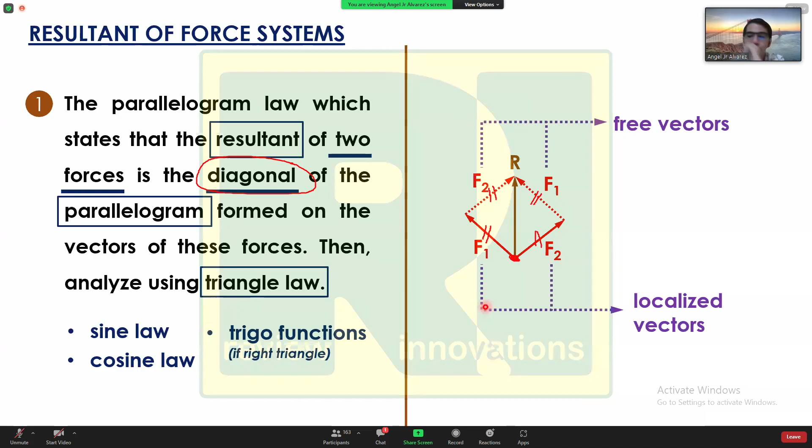Okay? So therefore, that is your answer for question number 1, 76.15. Sa mga hindi sanay na mag-simplify ng equations, pwede nyo namang i-shift solve. Okay? So shift solve, type nyo lang to, then shift solve. Okay po?

Okay, what about for question number 2? Pinapahanap for number 2, what is the corresponding value of the component along BB prime? So pinapahanap is yung force sa BB prime. Okay? Since meron ka ng value ng alpha, meron kang 300 dito, meron kang 240 dito, para maiba lang, let us use cosine law. Okay, cosine law naman ang gamitin natin.

Actually, pwede naman kayong mag-sine law kasi equal din dito sine alpha over F BB prime. Eh may value naman na kayo ng alpha. Okay? Pero para maiba lang, gamitan natin ng cosine law. That is your F BB prime squared. That is equal to what? Square nung first side at nung second side. So therefore, that is 300 squared plus 240 squared.

Minus 2 times product nung dalawang sides, which is 300 and 240. Then cosine of the opposite angle, ang opposite ni BB prime ay alpha. So cosine of 76.15 degrees. Okay? So in this case, you can now solve for the component along BB prime. Sige, try natin ha. Sorry.

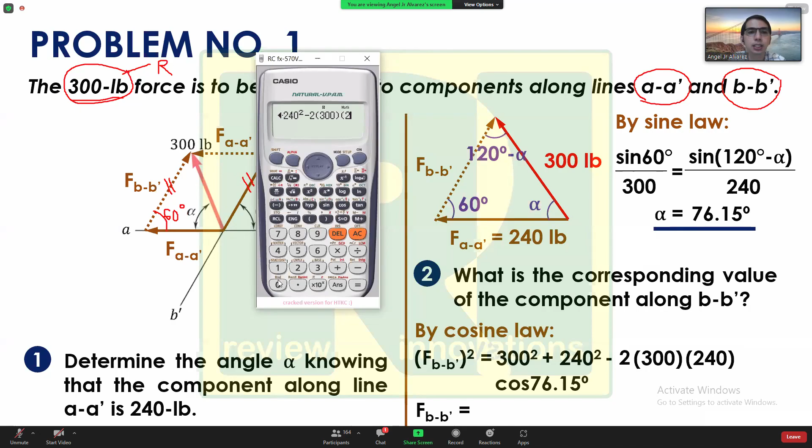Okay, that's 300 squared plus 240 squared minus 2 times 300 times 240 cosine of 76.15. Okay? Press equals. Kaso hindi pa ito yung sagot kasi equal pa yun sa naka-square. So therefore, take the square root. You will get 336.35. Okay?

If you don't round off, the exact answer is 336.33 pounds. Nevertheless, malapit naman yung sagot. Okay? So therefore, that is your answer for number 2. Any question? Ayun, may sumagot. 336.34. Okay po? Any question for problem number 1?

May question po? Malinaw po ba yung problem? So far, mukhang malinaw naman. Walang nagpo-question. Okay. But again, tatandaan, ang parallelogram law ay pwede mo lang magamit kapag resultant lang ng dalawang forces.

Okay? Ang tanong ngayon sa inyo, sir, paano po kapag more than 2 na yung forces natin? So, hindi na tayo pwede mag-parallelogram law. Okay? So, again, si parallelogram law ay pwede lang gamitin kapag 2 forces lang. Kapag more than na, hindi na natin pwedeng gamitin yan. So, ano pang ibang way para ma-solve natin yung resultant without using parallelogram law? So, discuss natin yung ibang ways para ma-solve yun.

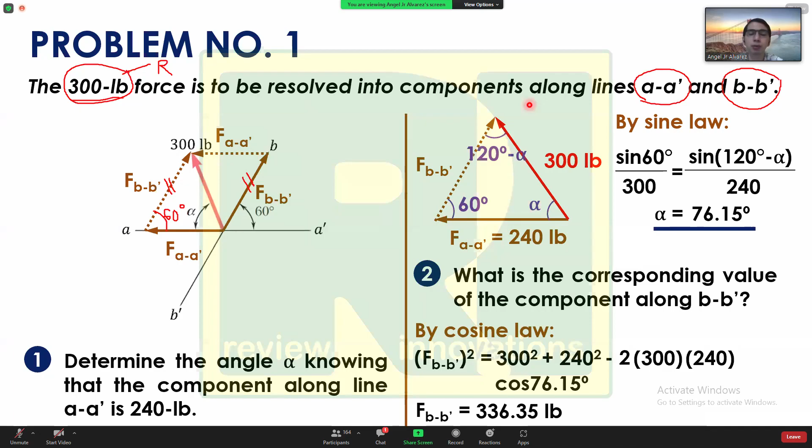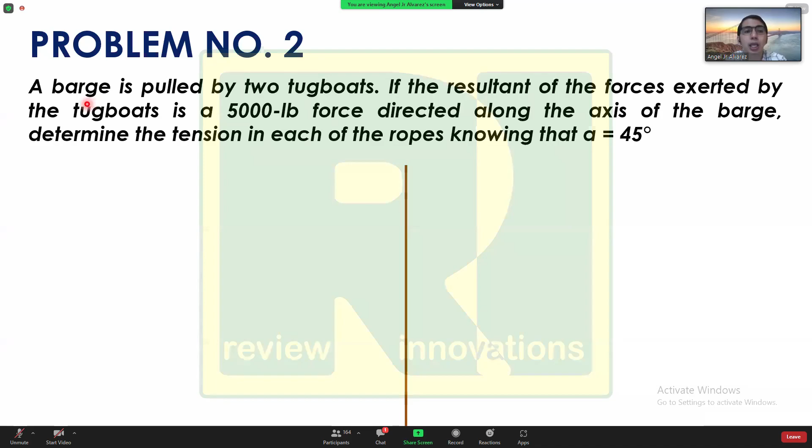But before that, discuss muna pala natin, meron pa tayong problem number 2. Sige, try natin yung parallelogram law pa para mas maintindihan natin. Problem number 2 muna tayo. Okay, for problem number 2, a barge is pulled by 2 tugboats. Ito yun.

Okay? If the resultant of the forces exerted by the tugboats is a 5,000 pound force directed along the axis of the barge, determine the tension in each of the ropes knowing that alpha is 45 degrees. Okay? So, dalawang forces lang naman ang humihila sa barge natin. Meron tayong rope 1, meron tayong rope 2.

At tatandaan po, kapag ropes, lagi yang tensile. Kasi kung ito yung rope nyo, pag hinila mo, may resistance. Pero kapag tinulak mo, walang resistance. Okay? So tatandaan po, kapag po ropes or cables, lagi pong tensile ang force. So let us say this is your cable 1 or rope 1, this is your rope 2.

Ilagay natin yung forces. Cut natin to, cut natin to. Lalabas po dito, tensile force for rope 1. This one is the tensile force for rope 2. Anong sabi? Ang resultant daw ng mga yan is a 5,000 pound force directed along the axis of the barge. So, ibig sabihin, binigay yung resultant.

So, ang gagawin natin, kukunin natin ang resultant ng dalawang to. Okay? Resultant ng dalawang forces. So, ibig sabihin, parallelogram law pa din. Tama? O, anong gagawin pag parallelogram law? Ito, kokopyahin sa tip ng other force. So, ito ay T1. Itong isang to, kokopyahin din sa tip ng other force. So, therefore, this is your T2.

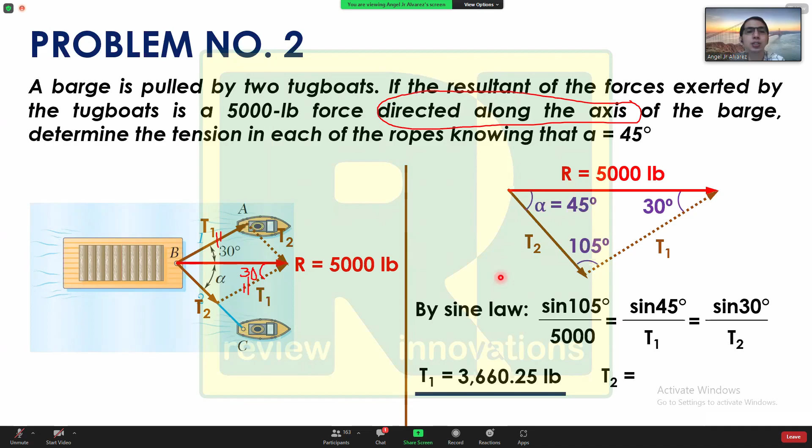So you can now solve for the value of T1 and T2. Okay, solve natin isa-isa. What about for T1? That's 5,000 sine 45 over sine 105. Calculating for your answer, you will get 3,660.25 pounds. What about for T2? For T2, that's 5,000 sine 30. So technically, papalitan lang natin yung angle. That's 5,000 sine 30 divided by sine 105. You press equals, you will get 2,588.19 pounds. And those are your answers for problem number 2.

Okay? Any question? May tanong po? Going once, twice, thrice, none po, sir. Okay, so thank you.

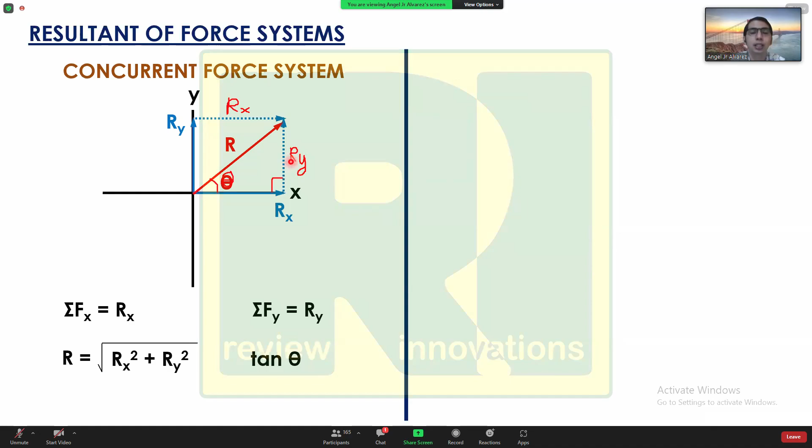Paano naman natin makukuha ang direction? Direction can be represented in terms of angle. So itong angle na ito, let us say this is angle theta. Paano ko masosolve ngayon si angle theta? Tangent of theta, that is opposite, which is Ry, over adjacent, which is Rx. So this is one way to calculate for your resultant force. Ang gagawin natin, yung lahat ng forces na ibigay, kung ilan man yan, pagsamasamahin ang x components, pagsamasamahin ang y components, then you get your resultant using Pythagorean theorem, and you get your angle using tangent theta equals Ry over Rx. Any question?

May tanong pa? Are you still there, guys? None po, sir. Sige, wala daw tanong.

Sige, try natin ha. Solve naman natin yung next problem. Sige, next problem po tayo. Problem number 3.

For problem number 3, the magnitudes of the three forces applied to the eyebolt shown are T1, which is equal to 515 newtons, T2, which is equal to 200 newtons, and T3, which is equal to 750 newtons. Replace these forces with a single equivalent force, R. So technically, pinapahanap po ang resultant force. Paano natin makukompute ang resultant force nito?

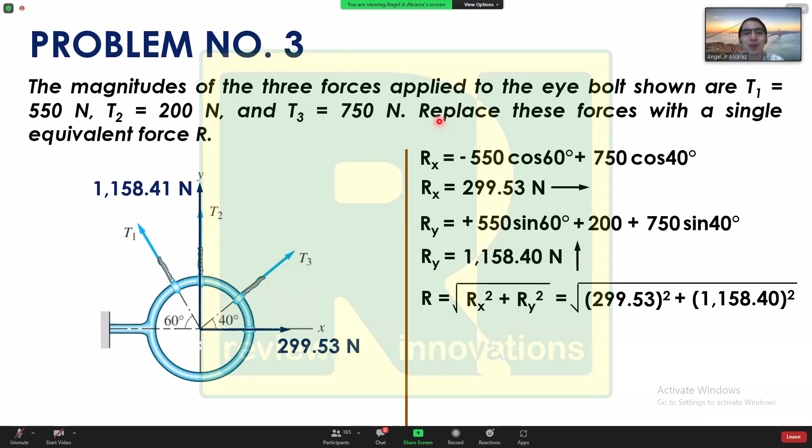Okay, so given that one, ibig sabihin, itong tatlong to ay mapapalitan na nitong dalawa. Isang to the right, na Rx, which is 299.53. Ito ay upwards kasi positive ang lumabas, isang upwards na 1158.41. So calculating for your resultant, that will be square root of Rx squared plus Ry squared. So therefore, that is square root of 299.53 squared plus 1158.4 squared. So therefore, the resultant, ang bilis nyo, 1196.5 newtons. And that will be your answer for this problem.

But again, sabi ko nga sa inyo, if you will calculate for resultant forces, dapat kompleto ang tatlong properties: magnitude, ito yon; direction and position. Yung direction, madali yon, you can represent that in terms of an angle.

So kung ito ang resultant natin na 1196.5, magsosolve tayo ng angle. Let us say ito yung angle na yon. Tangent theta is Ry over Rx. So your Ry is 1158.4 divided by 299.53. So therefore, your theta is 75.5 degrees. Ibig sabihin, itong isang to ay 75.5 degrees. Any question?

Pa-check po ng value ng theta. Kung tama bang 75.5? Wait lang, far from my calculator. Tama, sir. Okay, so therefore, that's 75.5.

Okay? Kasi medyo mahaba, di ba? Kasi solve ka pa Rx, Ry, tapos solve ka pa resultant, tapos yung theta, ibang solution pa yung theta mo. So ngayon, tuturuan ko kayo ng way kung paano masosolve to gamit ang calculators ninyo. Calculator lang ang gagamitin natin. Sige, try natin ha. Pero I do not suggest na you will rely on this solution. You need to know yung basic principle natin. Okay? In case malimutan yung calculator.

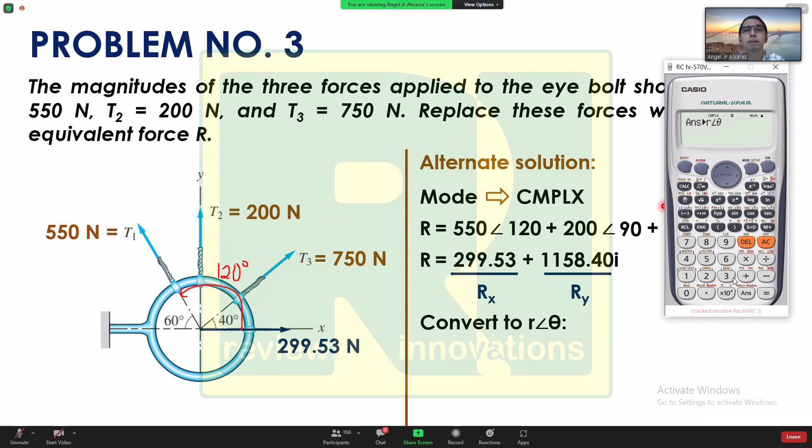Ngayon, paano natin sir palalabasin yung resultant? Okay, sige. Pag tininan natin yan, pag inequal nyo, ito si Rx, ito si Ry. Para mapalabas po yung resultant with the corresponding angle, you have to convert that in terms of R theta. So shift, you press shift, 2. Okay, yung number 2 dyan. Then i-convert daw natin sa R angle theta. So you press 3. You press equals. Lalabas po si 1196.5 angle 75.5.

Okay? So, ibig sabihin, this will be your resultant and this will be the value of your theta. Okay? So, yung theta na to, saan ba ang reference nitong mga angles na to? Lahat yan galing positive x. So, itong 75.5, ano ibig sabihin yan? Measure ka ng 75.5 degrees mula positive x, nandoon ang resultant force. So, therefore, this will be your answers. Okay? Any question?

Always counterclockwise po ba yung pag-consider sa angle, sir, pag naka-complex po? Yes po, counterclockwise coming from the positive x axis. Kapag po nag-clockwise kayo, for example, ginawa nyo clockwise, gaglagyan nyo ng negative sign yung angle ninyo. Okay, lalagyan nyo ng negative sign yung angle kapag nag-clockwise kayo dito. Okay? Pwede nyo namang baliktarin basta consistent kayo. Okay?

Applicable po ba siya sa lahat ng calculator? Yung 570 plus is may complex mode. Also, wait lang, yung Canon na F789 SGA, yung latest na pwede sa board exam for CE, I assume hindi kayo lahat CE, but for CEs, yung Canon na F789 SGA, meron din pong complex mode po yun. Okay, so you don't have to worry. Okay? For other courses, I guess pwede pa rin naman sa kanila yung 570. Yun yung pinapakita kong calculator dito. Okay? Any more questions?

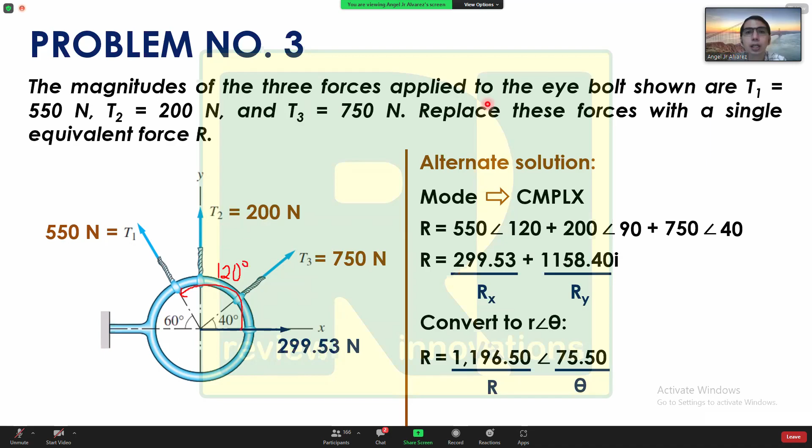Sige, may question pa? So, therefore, yan po yung possible or pwede nyo pong gawin to solve for your resultant forces. Okay, sir? Okay na po. Sige, try natin problem number 4. Paano pag medyo i-twist natin yung problem? Okay.

Determine P and theta so that the three forces shown are equivalent to the single force R, which is equal to 85I plus 20J kilonewtons. So we need to find the value of P and theta such that their resultant is this. What does it mean when it's in this form, of I, J, and K? It can have a K if we're in 3D.

But since we're only in 2D, you just have your I and J. When it says 85I, that means 85 is your X component of the resultant, so this is your Rx. And 20 will be your Ry. So you have your Rx and your Ry: 85 is Rx, positive 20 is Ry. Now, what we need to find is the value of P and theta. Let's start first with the manual solution.

Manual solution, for Rx: what is the X component of P? That is P cosine of theta, to the right, positive. Next is 40 cosine of 60 degrees, also to the right, positive. Minus, this is to the left, minus 30.

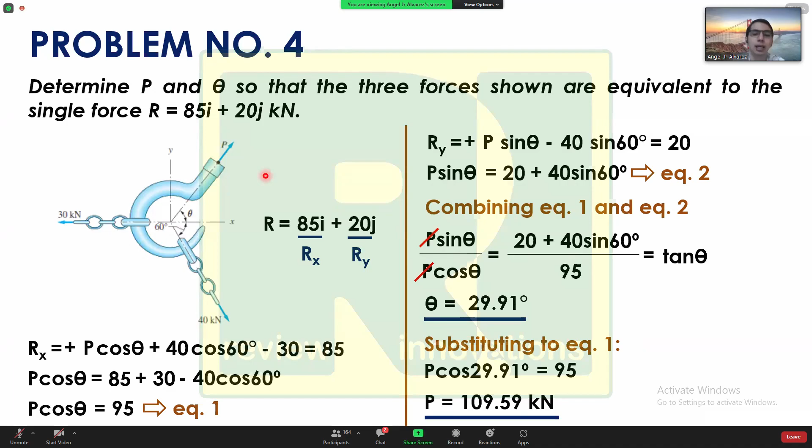Okay, our resultant, we know, Rx is 85, Ry is 20. So let's get the resultant: that is 85 squared plus 20 squared. So your resultant force will be equal to 87.32 kilonewtons.

Given that, let's also get theta. Your tangent of theta is equal to Ry, which is 20, over Rx, which is 85. So we can solve for the value of theta. What is the value of theta? You will get 13.24 degrees.

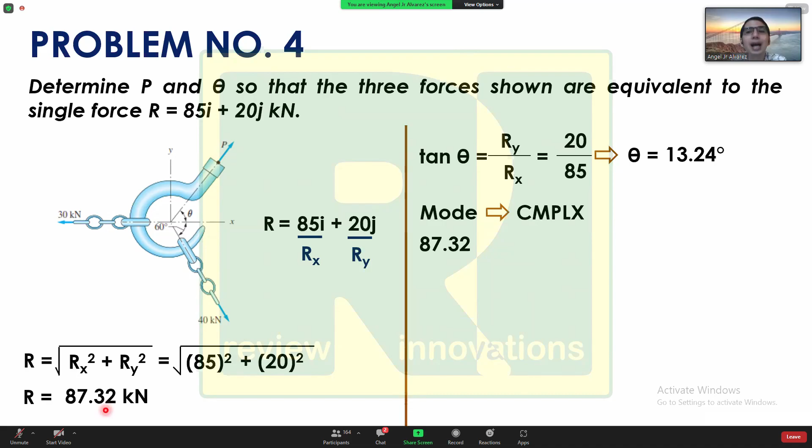Now, reversed, the given is the resultant. So 87.32 at angle 13.24, that equals the sum of these three. Right? What are those? P, angle from here to the positive x, that is angle theta.

Plus 30, this 30 here. What is the angle of 30 from the positive x-axis? That is positive 180. And for the last one, 40, angle 300 degrees, because from positive x, this is what we measure, so that is angle 300 degrees. So how can we solve for this P at angle theta? We just transpose it to the other side. So what do we do? Using your calculator.

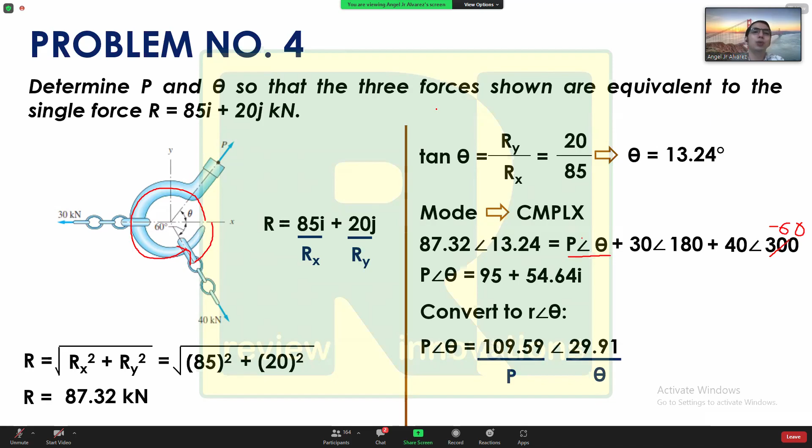Going once, twice, thrice. Ayun, question. None, sir. Okay, so walang question. So let's now try to proceed.

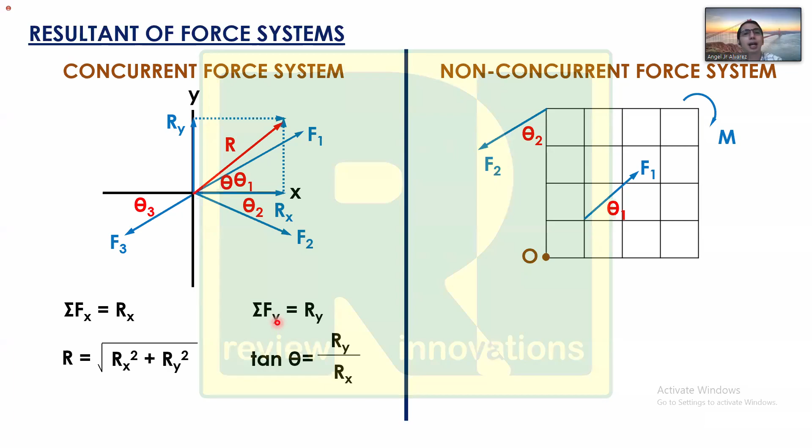Ang common solution, you just have to get your Rx and your Ry. Summation of forces along X is equal to Rx, and summation of forces along Y is equal to Ry. Then, same principle, you calculate for your R. R equals square root of Rx squared plus Ry squared, and tangent theta is equal to Ry over Rx. Sir, ano pong pinagkaiba nung dalawa? Again, if you are solving for forces, you have to get your three properties. First one, magnitude, represented by R. Second one, direction, represented by theta.

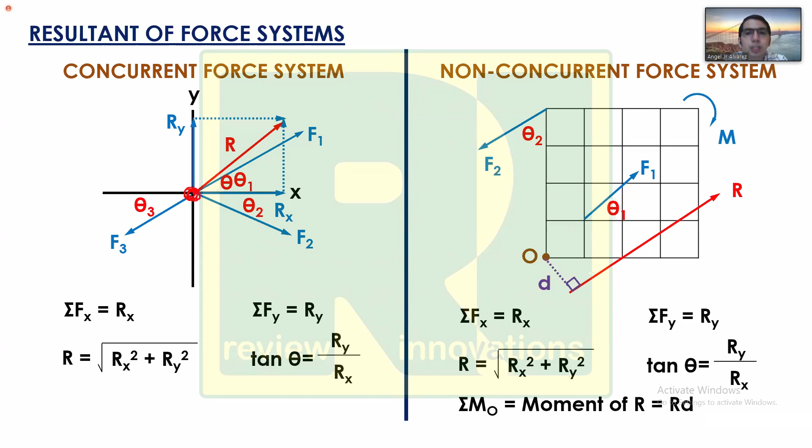Problem number 5 tayo. Sige. Walang question. Sige, problem number 5. For problem number 5, from the given set of forces shown, which of the following gives? Given this one, di ba? This one is non-concurrent. Kasi anong keyword natin for non-concurrent? Kalat-kalat lang yung forces ninyo. Walang common point, hindi rin parallel.

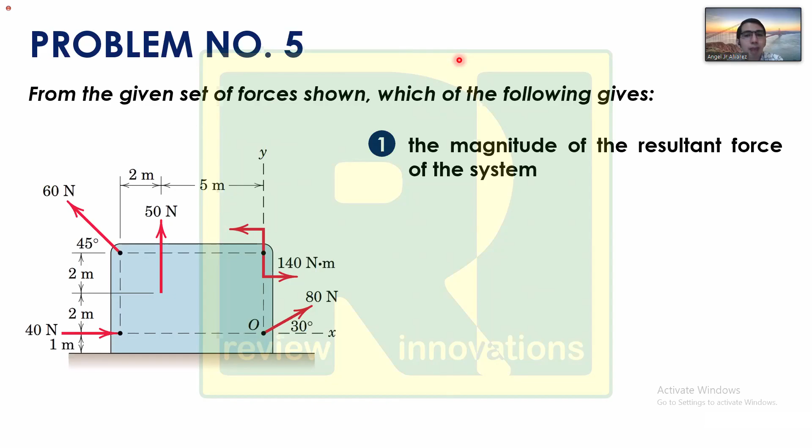So given the following forces, determine the magnitude of the resultant force of the system. Next, the angle that the resultant force makes with the horizontal measured counterclockwise. Next, the distance of the line of action of the resultant force from the origin. And the last one, the distance from the origin where the resultant intersects the x-axis. Let's now try to solve this one.

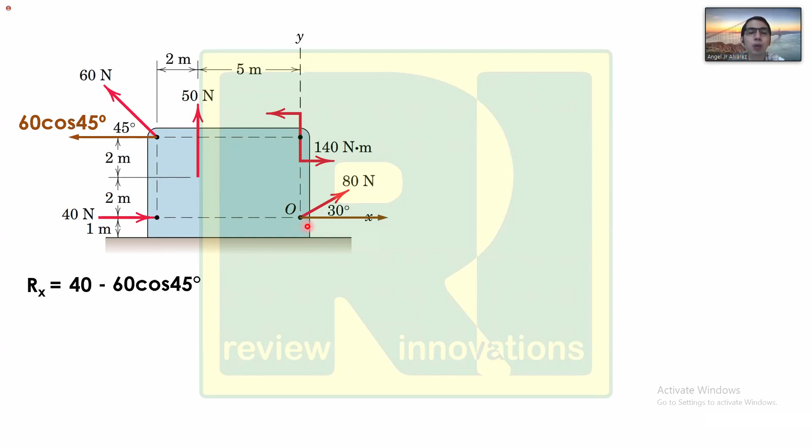Concurrent man or non-concurrent, you will always start with Rx and Ry. Let's start with Rx first. You have here 40 to the right, positive. Then itong isang to, meron siyang horizontal component na to the left. Ano yung horizontal component? 60 cosine 45. So meron tayo ditong minus 60 cosine 45. Ito, walang horizontal component. Itong 80, merong horizontal component to the right, which is 80 cosine 30 degrees. So meron ka ditong plus 80 cosine 30.

Oh, listen. This one is not a force. Hindi to force, ha? Kita nyo ang unit. Newton meter. Ito po ay isang moment. That is one way to represent a couple. So, couple po yan. So, paano ko malalaman ang direction nito? Mamaya natin i-discuss. But for now, gusto ko lang sabihin, hindi to kasama sa summation of forces along X and Y, kasi moment po ito.

Sige, pakisolve. Ilan po ang value ng Rx? Paki-compute po sa calculators. Ayan, may nag-solve. That is 66.86 newtons. Thank you. So the answer for Rx is positive 66.86 newtons. Positive, so therefore, to the right.

What about for Ry? For Ry, wala si 40. Pero meron si 60, that is upwards. Positive 60 sine 45. Plus 50, kasi upwards si 50. Then 80, vertical component is also upwards. Ang magnitude, 80 sine 30 degrees. So plus 80 sine 30. Sige, pakisolve po. Ilan po ang value ng Ry? Ayan, maraming sumasagot. Very good, guys. The answer is 132.43 newtons. Positive po ang lumabas, so ibig sabihin, upwards.

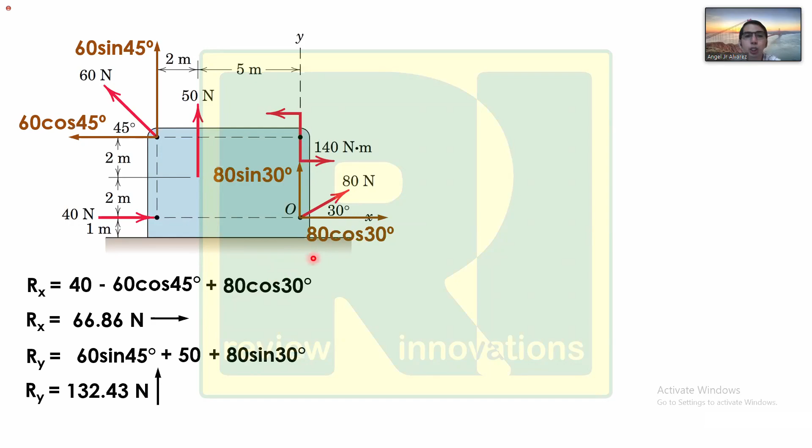Ngayon, paano natin ilalagay yung mga resultant na yan? I-drawing natin yung X and Y axis. This is your X axis, this is your Y axis, this is your origin. Since majority of your forces ay nandito, more likely ang resultant nyo andito sa side na to. Ano ang direction ng resultant? Ito ay upwards, ito ay to the right. So ang direction ng resultant ay upwards to the right. That is your resultant.

Given that one, anong components? 66.86 newtons to the right at meron kang upward component na 132.43. By parallelogram law, you can use Pythagorean theorem. R is square root of Rx squared plus Ry squared, so square root of 66.86 squared plus 132.43 squared. Ano po ang value ng R? Yan, buti may mga active. The resultant is 148.35 newtons. That is your answer for the first question.

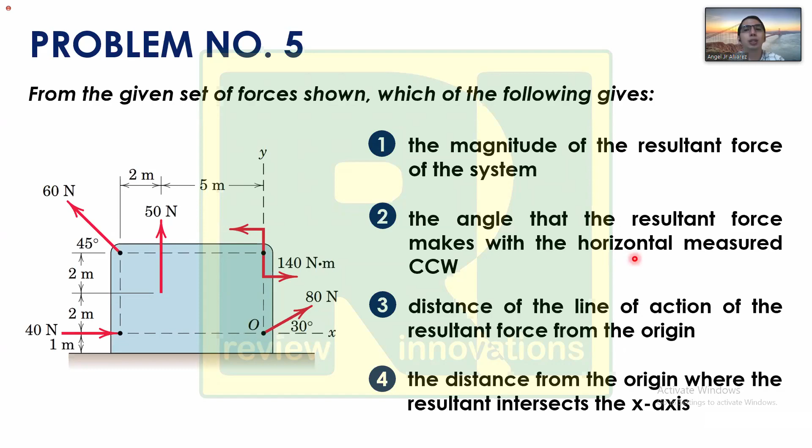For the second question, ang pinapahanap is the angle that the resultant force makes with the horizontal measured counterclockwise. So itong angle na to ang pinapahanap. Let us say that is angle theta. Copy mo lang dito sa kabila by parallelogram law, so that's 132.43. Using SOHCAHTOA, tangent of theta is 132.43 divided by 66.86. The angle is 63.21 degrees. That is your answer for question number 2.

Nakuha po? So therefore, those are your answers for the first 2 questions. So madali lang kasi kukunin nyo lang technically ang resulta. Okay? But the challenge starts with question number 3. Ano sa number 3? Pinapahanap po the distance of the line of action of the resultant force from the origin.

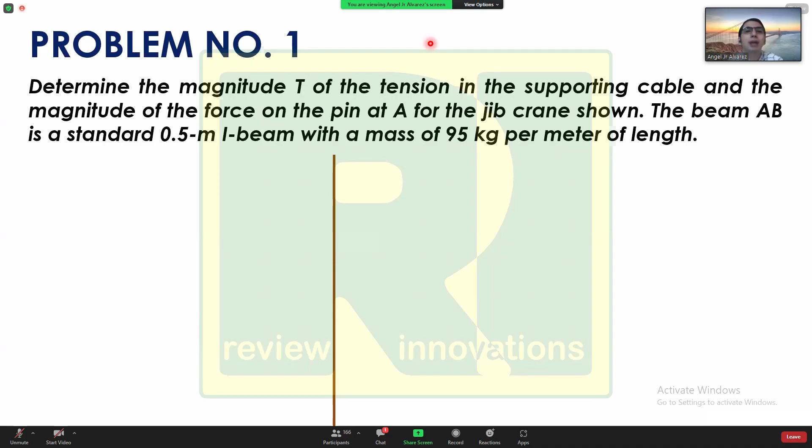Determine the magnitude T of the tension in the supporting cable and the magnitude of the force on the pin at A for the jib crane shown. The beam AB is a standard 0.5 meter I-beam with a mass of 95 kilograms per meter of length.

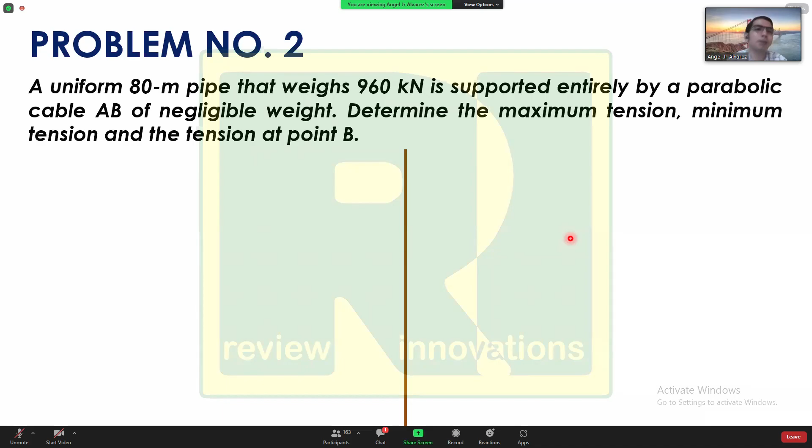Okay, so technically you are given a parabolic cable. Ano ba pag sinabi nating parabolic ang isang cable? You have to remember by basic principle, pag sinabi po nating parabolic ang cable, the loading is distributed uniformly along the horizontal.

So ibig sabihin, yung loading natin, sinasabi dito, a uniform 80-meter pipe that weighs 960 kilonewtons, yung 960 kilonewtons divided by 80. So magiging uniformly distributed load yon. Tama? Again, 960 kilonewtons divided by 80, yun yung magiging uniformly distributed load, nakadistribute sa horizontal.

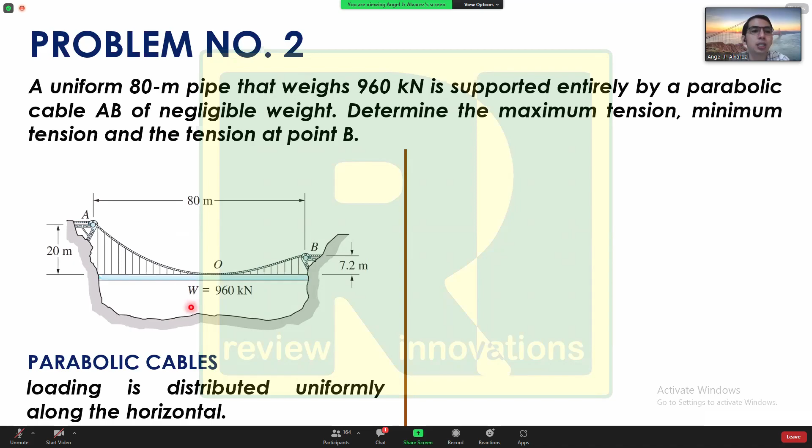So ibig sabihin, kapag dinrawing po natin yan, your W is 960 divided by 80, that is 12 kilonewtons per meter. So pag nilagay ko yan dito sa figure, that will be a uniformly distributed load along the horizontal. Okay, so therefore that is 12 kilonewtons per meter.

Okay, ngayon given that one, anong gagawin natin dito? There are several steps para makapag-analyze tayo ng parabolic cable. Okay, pero ito naman mga basic principles din lang to ng equilibrium. So you just have to remember yung mga important steps na kailangan natin sundin.

Okay, so first step natin is to locate your lowest point. Okay, kailangan daw nating malaman nasaan ang pinakamababang point ng cable. Let us say your lowest point is at point O, ito yung lowest point natin. Let's say that is your point O, O stands for origin.

Okay, so ibig sabihin yung origin natin, ilalagay natin dito sa lowest point. Eh ano ba pag sinabi nating origin? Pag sinabi po natin origin, that is the intersection of what? Of your X and your Y axis. Okay, so intersection siya ng X and Y axis. So technically, yung lowest point natin, that will serve as your origin.

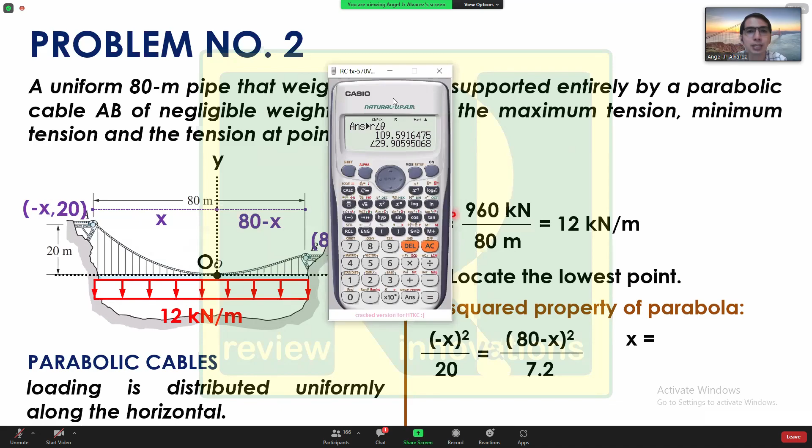Naka-square po ang X. So, tama na naka-square ang X, kaya po yung mga X coordinates dito is square natin. Okay? Square ito, then ito, square nyo din. Okay? So, in this case, you can now solve for the value of your x. Sige nga po, pakisolve po ng dalawang values ng x. Dalawang values ng x po ang lalabas dito. Sige, para makita nyo kung paano palalabasin parehas using shift solve.

Mode 1. Okay. So, therefore, we have here negative alpha x squared over 20. That will be equal to... ulit, that is negative alpha x squared over 20, that will be equal to 80 minus x, that's 80 minus x squared over 7.2.

Kapag nag-shift solve kayo, naka-initialize ang value sa 0, you press equals, lalabas yung isang value, 50. Kaso since naka-square to, dalawa ang values dyan. So ang tanong, paano nyo palalabasin yung other value using shift solve pa din? Sige, so gawin nyo ulit, shift solve ulit tayo, pero babaguhin nyo na yung initial value nyo.

Okay, so ilayo nyo. For example, gawin kong 200, press equals, so 200 yung isang value. Okay, nagkataon lang yan ha. Pagpalagyan natin, sige, 150, lalabas yung isang value na 200. Pero kapag sinif-solve ko ulit yan, ginawa ko ulit 0, lalabas yung isang value na 50. Bakit ganon? Kasi yung 50, mas malapit sa 0, kaya kapag 0 ang initial value nyo, 50 yung lalabas.

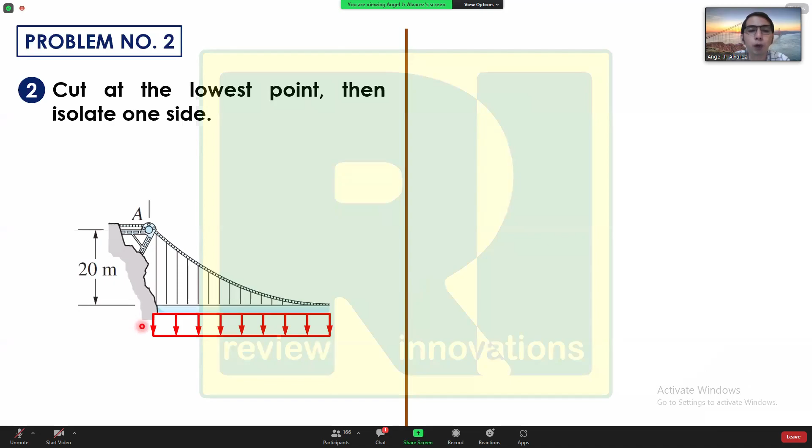Next one, meron siyang dalawang components. Meron ka po ditong AX at meron ka ditong AY. Next one, tama bang ito yung lowest point natin? Yes. Tatandaan, sa lowest point, laging horizontal ang tensile force. So horizontal ang tensile force natin dito. Let us say that is the value of TO.

Okay? So, paano natin ito masasolve? Ilagay natin yung dimensions. Nakuha na natin to. Ito yung value ng x. So, therefore, that is 50 meters. Okay? Next one, nakuha na natin. Kunin natin yung resultant nito. Ano po ang resultant nito? That is 12 times 50. Therefore, that is equal to 600 kilonewtons.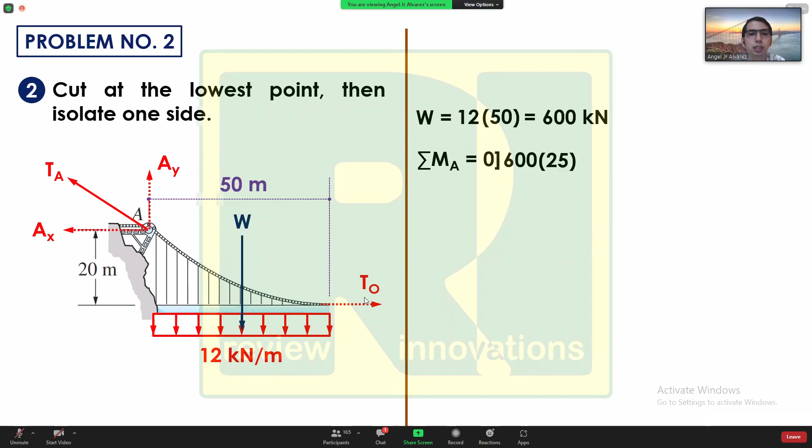Eh, nasaan ba ang weight? Tama bang ang weight ay nasa gitna lang? Yes, nasa gitna lang po yan. So, kung 50 po ito, ang distance na ito ay kalahati ng 50, which is 25. Okay? Next is TO. TO is counterclockwise negative. Ang distance po ay itong vertical distance na 20. And that will be equal to 0.

Can you now solve for the value of TO? Yes, pakisolve po ng value ng TO. Ilan po ang TO? Okay, ayan na. 750 po. Okay, so thank you. So the answer is 750 kilonewtons. Okay? So you now have the value of your TO. So technically, okay ka na sa TO.

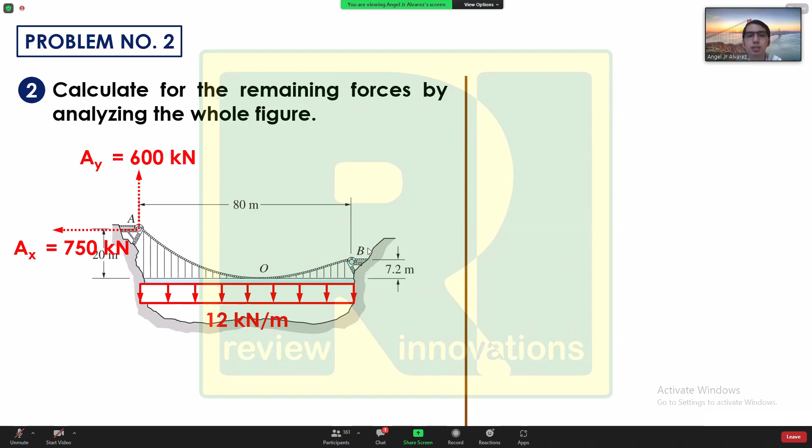Yes. But before that, meron tayo ditong uniformly distributed load, 12 kilonewtons per meter. Yung reaction sa A, nakuha na natin. Meron kang AX na 750 kilonewtons. Meron kang AY na 600 kilonewtons. Ang tanong, makukuha ko na rin ba yung components sa B? Yes. Kasi meron ka ditong tensile force kay B na may components BY at saka BX. Pag kinuha ko resultant nito, makukuha ko ang tensile force kay B. Nasundan po? Okay, so paano ko masosolve si BX at si BY?

Summation forces. So, summation forces along X, that is equal to 0. Meron kang BX to the right, positive, minus 750. So, therefore, that is equal to 0. So, therefore, your BX is equal to 750 kilonewtons. Okay? What about for BY? Makukuha ba natin si BY? Yes. Summation forces along Y is equal to 0.

600 is upwards, positive. Paano naman yung 12? Kailangan resultant. So, 12 kilonewtons per meter downwards, negative. Saan ko i-multiply? Sa total length, which is 80. Then BY is upwards, positive. So, therefore, that is equal to 0. So, therefore, your BY is equal to what? Pakisolve po, ilan po ang value ng BY?

The value of your BY is equal to 360 kilonewtons. So therefore, that is 360. Can we now solve for the reaction at B? Yes, that is a tensile force at B, which is equal to the square root of BX squared plus BY squared. So equal siya kay square root ng 750 squared plus 360 squared.

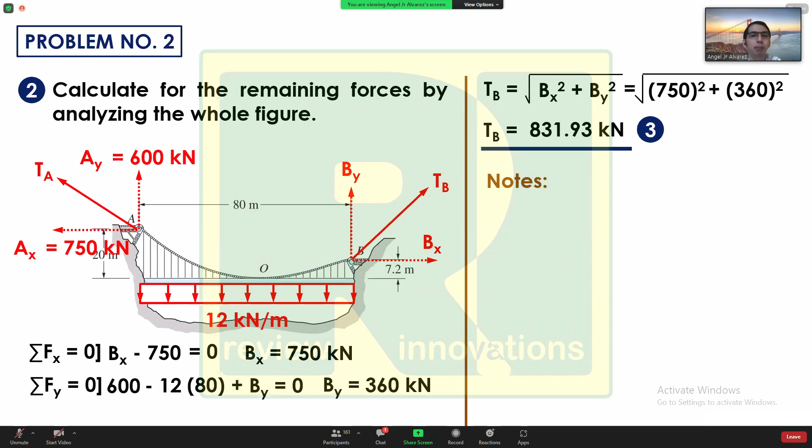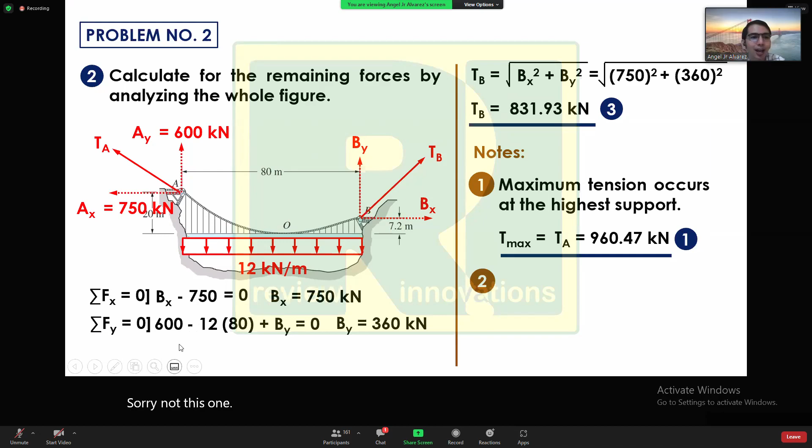Pag maximum tension, tandaan po, the maximum tension always occurs at the highest support. Ganyan po pag parabolic cable. Kung ano yung pinakamataas na support, yun yung may maximum tension. Alin ba ang pinakamataas na support? Si A. So, ibig sabihin, your maximum tension is a tensile force at A, which is equal to 960.47 kilonewtons. And that is your answer for number 1. Okay? 960.47, yun po yung nakuha natin kanina.

And what about for the minimum tension? The minimum tension, of course, at the lowest point. O, tanong, nasaan ba ang lowest point? Sige nga, nasaan ang lowest point? Anong point yon? Oh, nasa origin. So, tama. So, therefore, asan ang minimum tension? Your minimum tension is the value of your TO. So, your Tmin is your TO, which is equal to 750 kilonewtons. So, therefore, that is your answer for number 2.

So, you have to remember, for parabolic cables, lagi nyong unang hahanapin ay ang lowest point. Because that will be your cutting point. Doon kayo magpuputol. Then you have to isolate either the left side of your parabolic cable or the right side of your parabolic cable. Okay? Any question? Malinaw ba yung pagkakadiscuss po nung number 2?

Yes, sir. Is that specifically for parabola only? Yes po. Pag parabola po, you have to locate your lowest point. There are some instances na ang loading ninyo ay hindi po sa horizontal nakadistribute. There are some instances na nakadistribute sa length ng cable. Yun po ang tawag doon ay catenary cables, which I choose not to discuss kasi formula-based po lahat yun. Baka malito lang muna kayo. So, reserve na lang natin yun sa respective review classes ninyo.

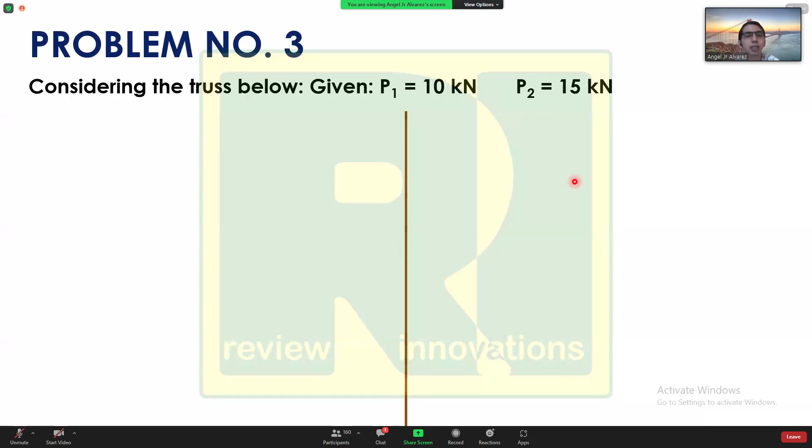Okay, sige. Try natin i-solve ngayon yung problem number ano ba tayo? 3. Okay, problem number 3. For problem number 3, considering the truss below, given P1 is 10 kilonewtons and P2 is 15 kilonewtons. Given this one, first question, before we start solving the problems, let us draw first your free body diagram.

Wait lang ha, magre-reshare lang ako ha, kasi naglalag siya. Hindi sumusunod yung cursor. Try ko lang mag-reshare guys, sorry. Stop share pala, sorry. Naglalag kasi siya.

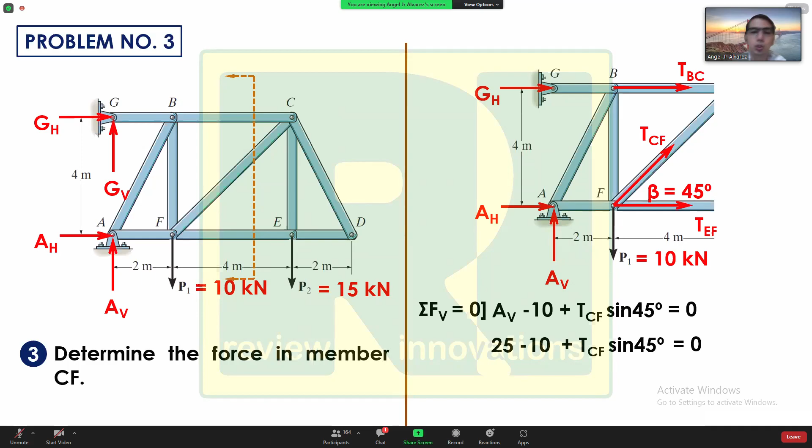Eh, di ba na-solve na natin yung AV? Yes sir, that is 25. So 25 minus 10 plus TCF sine 45, and that will be equal to 0. Pag-solve po, ilan po ang value ng TCF?

21.21 kilonewtons. Ano po ang sign? Positive or negative? Positive ba? Kasi ito ay positive 15. Pag nilipat ko, magiging negative. So dapat negative to. Negative. Okay, so negative 21.21. Sige, check nyo ha. That's negative 21.21 kilonewtons, which means, automatically, since consistent tayo sa assumptions natin, negative means compression.

So, therefore, that's 21.21 kilonewtons under compression. That will be your answer for problem number 3. Any question? Okay, tama, compression pala, sir. Yes, that's under compression. Any question?

May tanong po? Okay, kung walang question, let's solve another truss problem. Pero bigyan natin ng konting challenge. Okay, let's start with problem number 4.

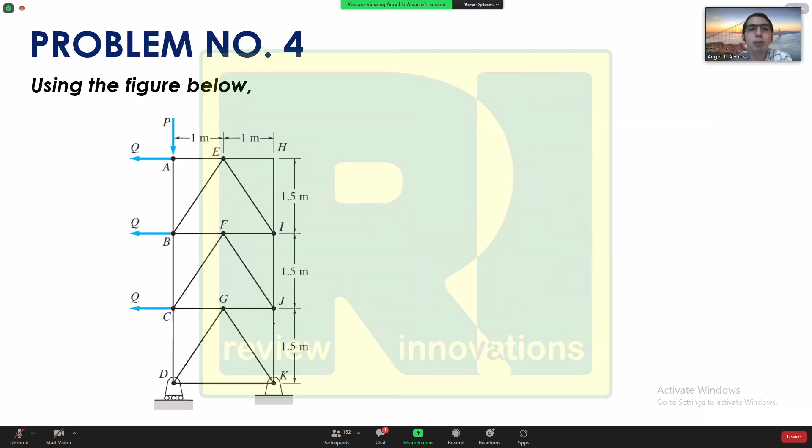Malapit na to, friction na lang, then we're done. Okay, problem number 4, using the figure below. Okay, for CEs out there, for civil engineers out there, medyo similar to sa problem na binigay ng board exam. Okay, but anyway, for problem number 4, using the figure below, first question: if P is equal to 3,000 newtons

and Q is equal to 1,000 newtons, determine the force in member CD. Second question, same condition, P is 3,000 newtons and Q is 1,000 newtons, determine the force in member JK. Okay, so pinapahanap force kay member CD at force kay member JK.

So kapag ganyan, automatically, sir, malapit naman po sa supports. Why not use method of joints? Kapag nag-method of joints tayo, tingnan nyo ha. Obviously, you can calculate for the support reactions. Madali lang yan, support reactions, kaya nyo yan. But you can solve this problem without calculating the support reactions. Paano? Ganito gagawin natin, hindi ko marirecommend ang method of joints.

Bakit? CD ang pinapahanap. Kapag nag-joint ako sa D, katong tatlong unknowns agad yan. Tandaan, sa method of joints, sige nga, ilang equations lang ang kaya nyong gamitin. Sa method of joints, ilang equations lang? Hanggang 2 equations lang tayo. Summation forces vertical at summation forces horizontal. Kapag kinat ko to, 3 agad yung unknowns mo. So ibig sabihin, hindi pwede.

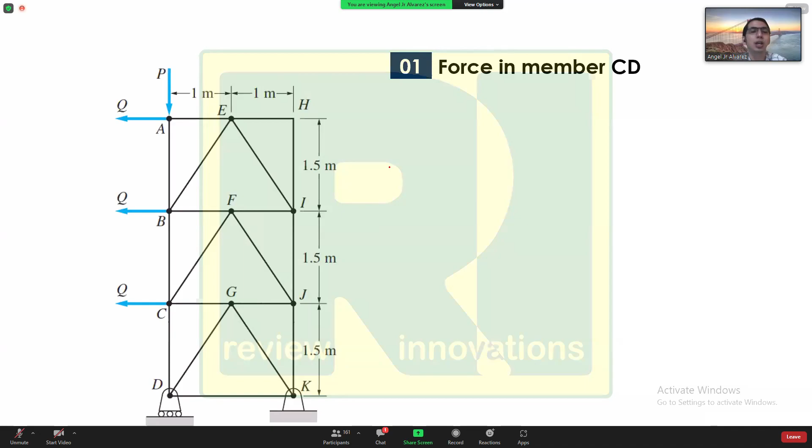So tatlo. So ibig sabihin, ganito natin siya ikakat. Okay? I hope nasundan. Okay? So technically, magkaiba pa rin yung forces doon. Pero masosolve pa rin natin kasi nga they can be treated as one, kasi isang direksyong member lang sila. Pag sinabing collinear, acting on the same line. So technically we will cut it this way, and isolate the upper side. Okay? I hope nasundan yon.

So ano mga forces ang lalabas? Assuming tension lahat. Meron ka ditong force kay... wait lang. Force kay CD, force kay JK, force kay CG, at force kay JG. Anong pinapahanap na una? Pinapahanap po is the value of CD. O sige nga, saan ako magmo-moment? Para ma-solve ko tong CD, kailangan mawala itong tatlong to.

O saan ako magmo-moment para makuha ko si CD? So yan, diba? Kita niyo agad, moment tayo sa point J. Okay? So summation moment about J, that will be equal to 0. First one, 1,000, that's counterclockwise, negative. Ang distance, itong total height na to, 3 meters. Another 1,000, that's counterclockwise, negative. Ang distance, 1.5.

Okay? Next one, yung 1,000 na to, wala nang moment yan, dumadaan na yan dyan, tama? Ito, wala na to. 3,000 naman tayo, counterclockwise, negative. Ang distance, 2 meters. Then FCD, counterclockwise, negative. Ano po ang distance? Ang distance, 2 meters pa din. And that will be equal to 0. Pakisolve po, ilan po ang value ng FCD? Pakisama po ang sign if possible. Okay?

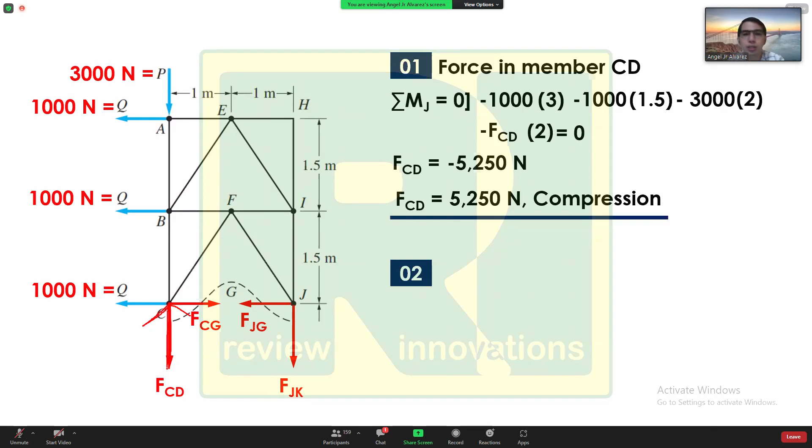Nakuha po? Oh, what about for question number 2? So kung compression to, ibig sabihin kung babaguhin natin to, dapat ito ay upwards ang force. Ay, dapat upwards yan. Okay? So for force in member JK, for the sake of verifying our answer,

Magmo-moment din tayo dito. At para ma-solve ko si JK, moment ako kay C. So summation moment about C, that is equal to 0. That is 1,000 counterclockwise negative, distance 3. 1,000 counterclockwise negative pa rin, ang distance 1.5. And FJK, itong 3,000, wala na yung moment kay C. Ang FJK, clockwise, positive, ang distance po 2 meters. And that will be equal to 0.

Pakisolve po ang value ng FJK. Sige, anong value ng FJK gamit itong solution na to? Ano po ang value ng FJK? Your FJK is 2,250 newtons, positive, so that is under tension. Okay? So kung i-verify niyo yung sagot niyo, ilan to? This is 2,250.

Tama yung direction na pababa siya, kasi away from the joint, that's under tension. Ito towards the joint, so pataas, na equal saan? Equal sa 5,250. So technically tama yung sagot natin. Bakit? Summation forces vertical dapat equal sa 0. Upwards 5,250 minus 3,000 minus 2,250, then that is equal to 0.

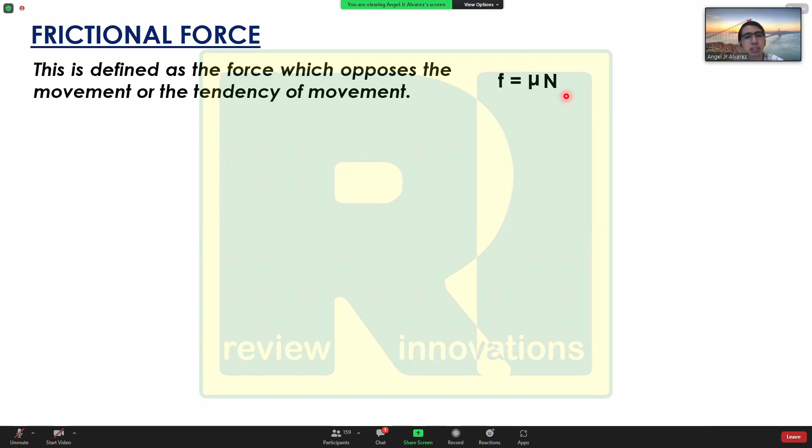Ano po sir yung mu? Mu is the coefficient of friction. N is your normal force. Sir, lagi po bang kapartner ni friction si normal? Yes, kasi sabi ko nga, kapag may dalawang objects na magkadikit, laging dalawa ang forces: coefficient of friction na mu at normal force na N. So, laging magkadikit yung dalawa such that your friction is equal to the coefficient of friction mu multiplied by your normal force. Ang problema nyo nga lang dito, dalawa ang possible values ng mu.

There are instances na you will use mu-s at there are instances na you will use mu-k. So ano po yung mu-s? Ang mu-s is the coefficient of static friction and mu-k is the coefficient of kinetic friction. Paano po namin malalaman kung alin sa dalawa ang gagamitin? Una, kapag may binigay sa problem at hindi in-specify kung ano yun, malamang yun yung gagamitin nyo. Paano sir pag parehas pong binigay tapos isa lang naman ang tinatanong? Doon tayo ngayon magkakaproblema. You have to remember kung kailan gagamitin si mu-s at kailan gagamitin si mu-k.

Malalaman natin kung kailan gagamitin si mu-s at si mu-k by determining kung anong type ng friction ang na-experience ng body ninyo. Kailangan nating malaman kung anong type ng friction ang na-experience ng body. Ilan ba ang types ng friction? 3. So, 3 yung types ng friction at kailangan nating malaman sa kada type ano ang gagamitin.

mu-s or mu-k. Para mas madali nating ma-discuss yan, i-graph natin yung frictional force na na-experience ng body. Kahit anong body, ganito ang graph ng frictional force. Let us say, let's start with the first type ng friction, static friction. Pag sinabing static friction, that is the friction force when the body remains at rest and has a value between 0 and the limiting friction. Tingnan natin sa graph. Ito yung force na i-exert para mapagalaw yung object. Yan yung x-axis. Ang y-axis natin, that is your frictional force.

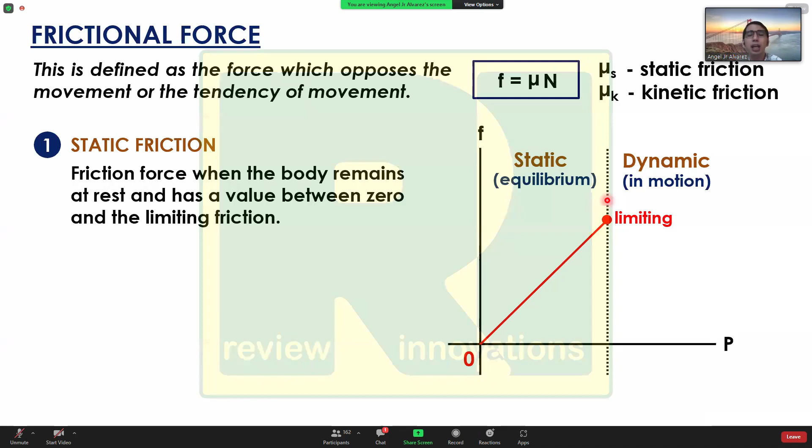Ano yung sinasabing limiting friction? Limiting friction is the limiting value of frictional force when the motion is impending. Ano ba pag sinabing impending motion? Again, ano tong force na to? Sir, yan po yung force na i-exert natin para po magsimulang gumalaw yung object. Ibig sabihin, pag sinabing limiting friction, magsisimula pa lang gumalaw ang object.

Ang tanong, gumalaw na ba? Hindi pa, hindi pa gumagalaw yan. Sa point na to, hindi pa siya gumagalaw, gagalaw pa lang. Ibig sabihin, konting tulak pa, magsisimula na siyang gumalaw. So again, tinutulak mo ng tinutulak, nilalakihan mo yung force, hanggang sa pagdating dito, konting tulak pa, gagalaw na yung object. Ang tawag natin sa point na to, yan yung limiting friction. At pag limiting friction, the motion is impending. At that point, your mu is mu-s. Diyan natin gagamitin ang full value ng mu-s. So dito, ang frictional force ay mu-s times the value of n.

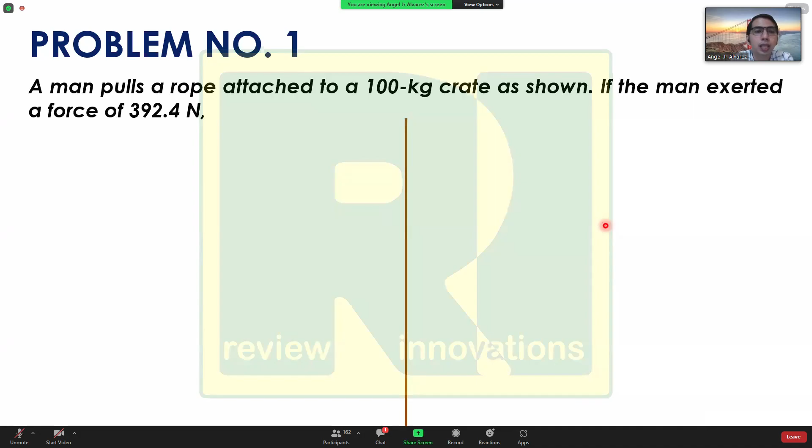May tanong po? Sige, try nating isolve yung mga problems po para mas madali nyong maintindihan. Okay, for problem number 1. A man pulls a rope attached to a 100 kilogram crate as shown. If the man exerted a force of 392.4 newtons, first question, determine the frictional force if the coefficient of static friction between the crate and the floor is 0.4.